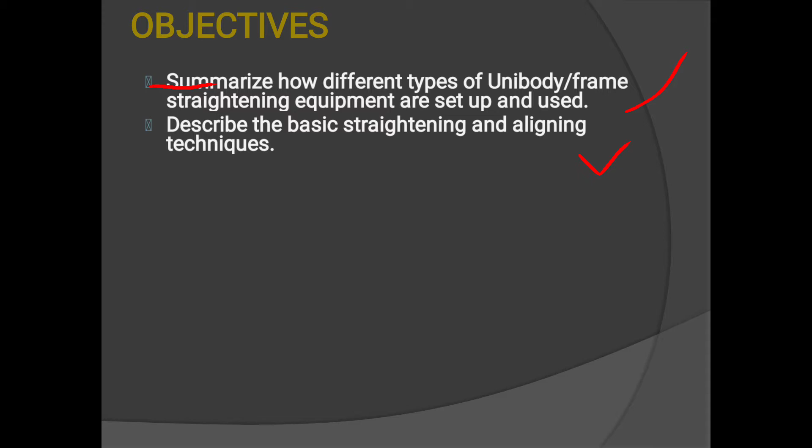First, objectives. Summarize how different types of unibody frame straightening equipments are set up and used. Describe the basic straightening and aligning techniques. Determine pull directions by analyzing damage.

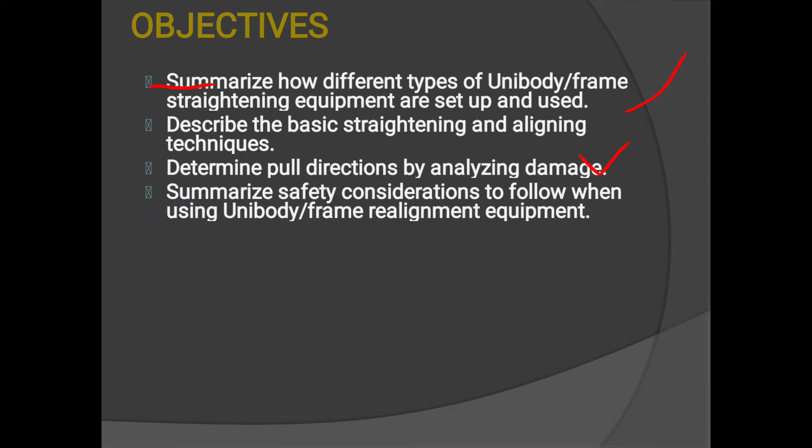Summarize safety considerations to follow when using unibody or frame realignment equipments. Properly plan and execute collision repair procedures. Identify signs of stress or deformation on a unibody vehicle and make the necessary repairs.

Compare the difference between the straightening of unibody vehicles and larger full-frame vehicles. Explain why you might need to pull damaged parts before their removal.

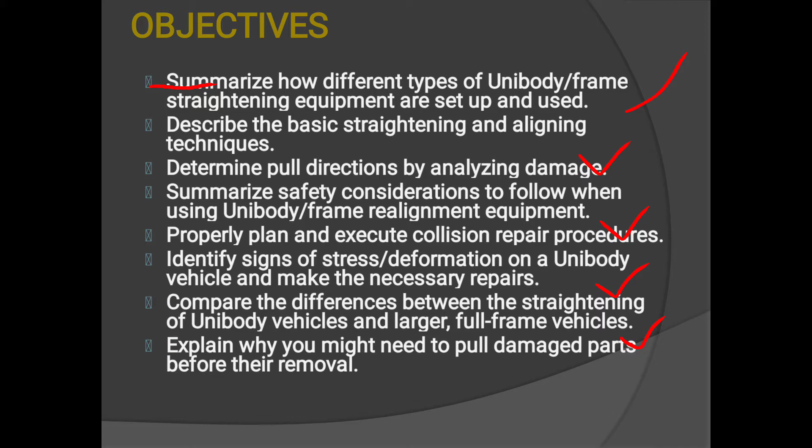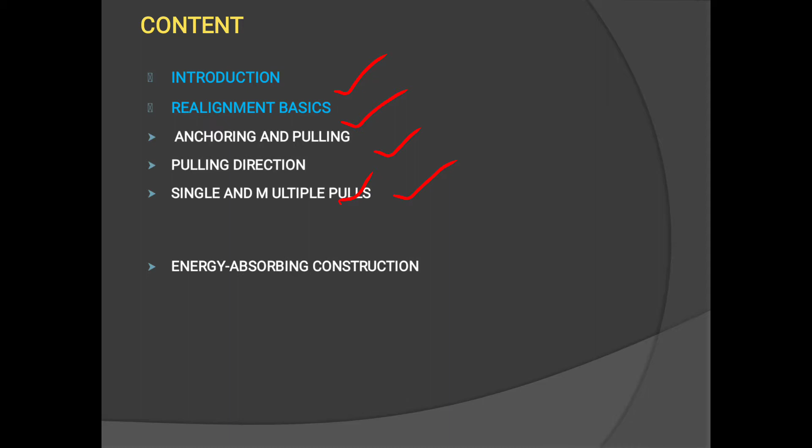Content. First, introduction, then realignment basics. In realignment basics, anchoring and pulling directions, single and multiple pulls, energy absorbing construction,

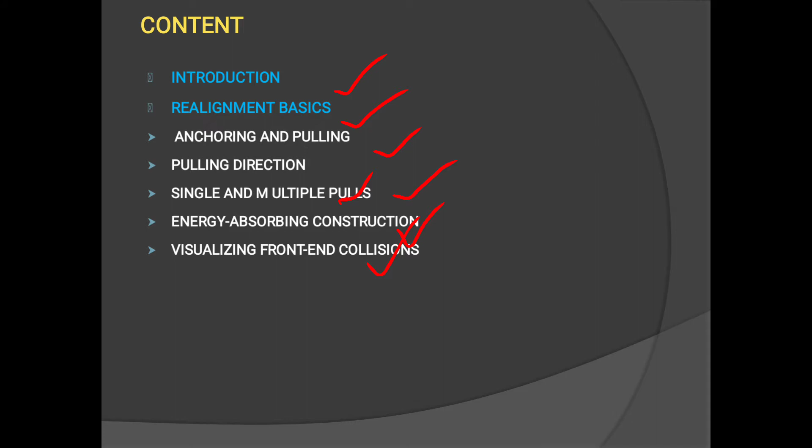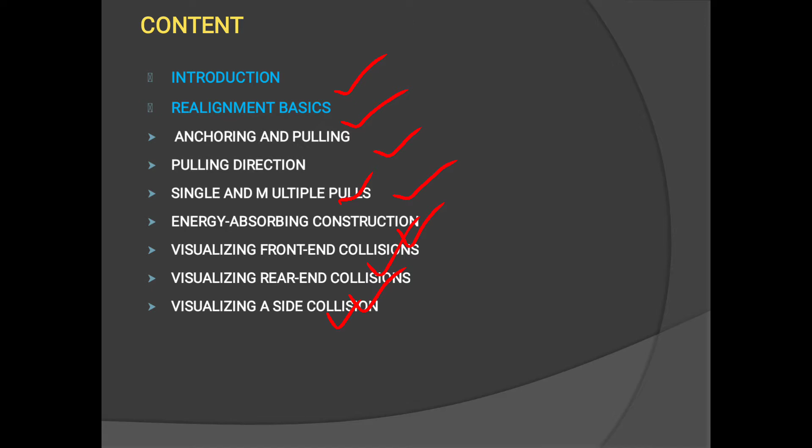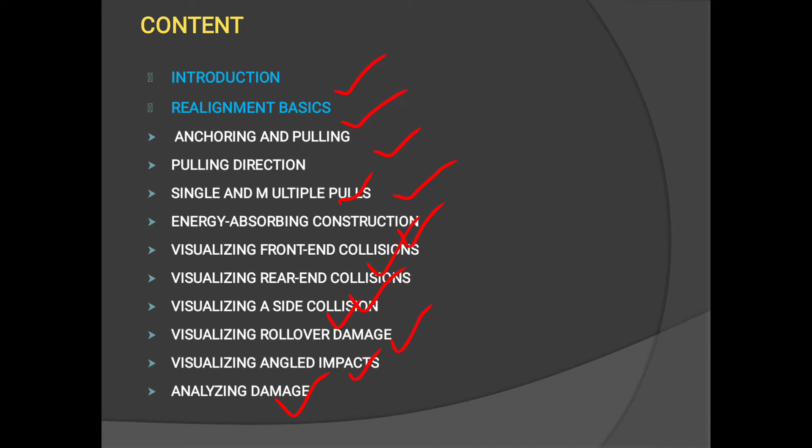visualizing front end collision, visualizing rear end collision, visualizing side collision, visualizing rollover damage, visualizing angled impacts, and analyzing damage. So let's start with the introduction.

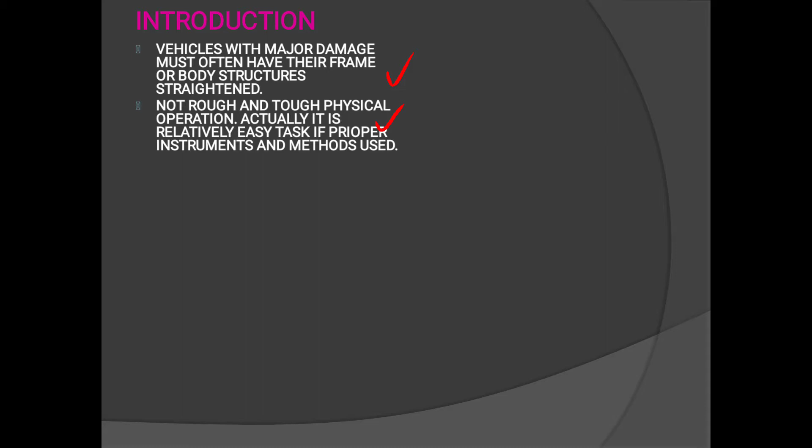Vehicles with major damage must often have their frame or body structures straightened. It is not a rough and tough physical operation. Actually, it is a relatively easy task if proper instruments and methods are used. An important requirement when straightening is accuracy. If the frame or unibody is not straightened exactly, panels will not fit and the wheels may not be alignable.

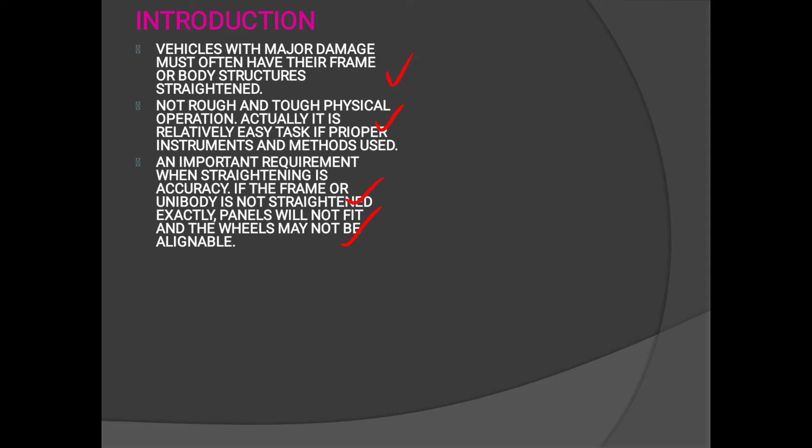It involves using high-powered hydraulic equipments, mechanical clamps and chains to bring the full frame or unibody structure back into its original shape. Accurate vehicle alignment positively affects safety, repair time, repair quality, and the confidence of your customers.

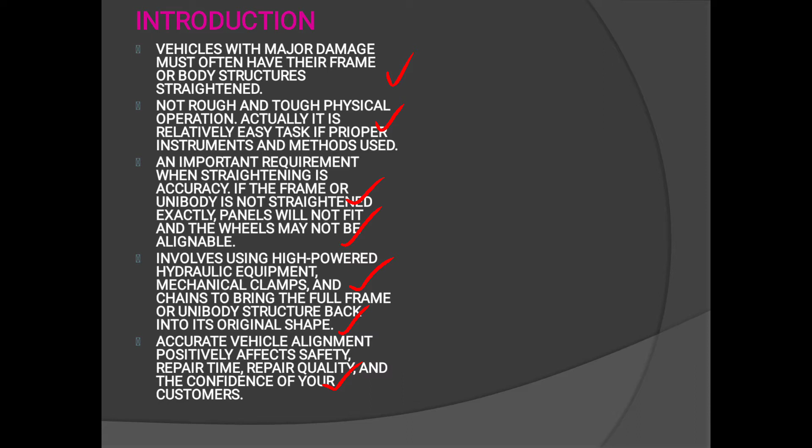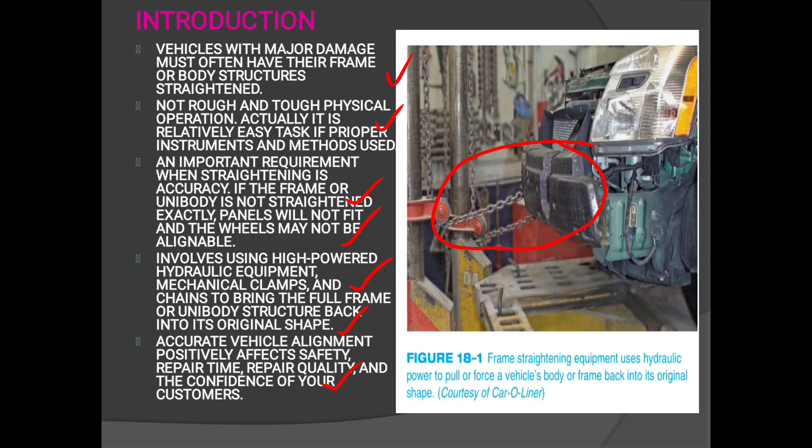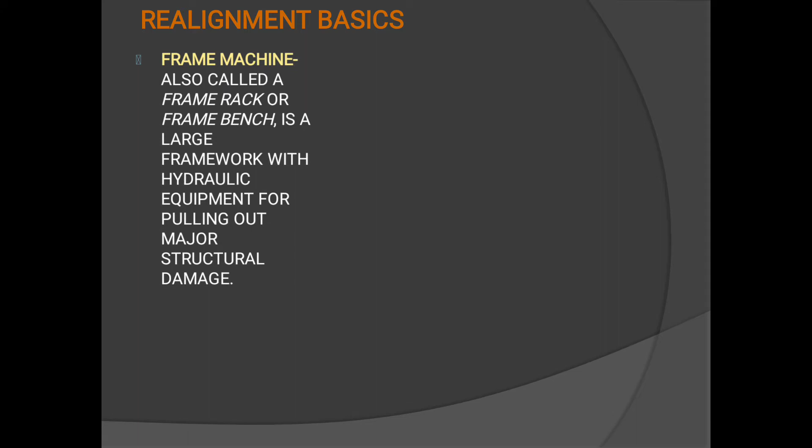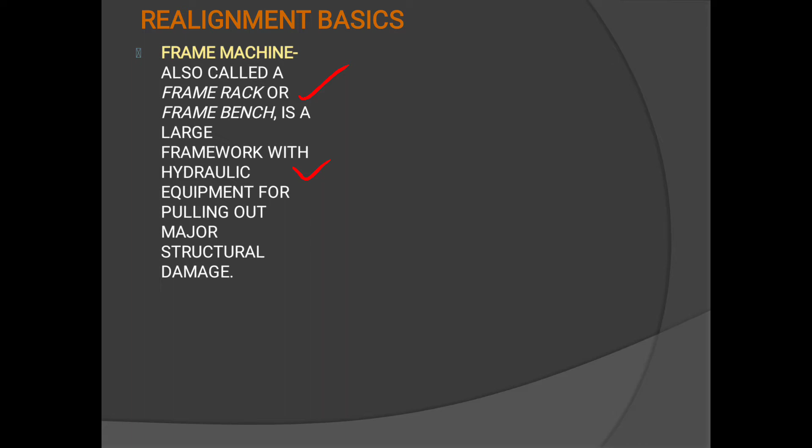Figure shows frame straightening equipment uses hydraulic power to pull or force a vehicle body or frame back into its original position or shape. Realignment basics. Frame machine, also called a frame rack or a frame bench, is a large framework with hydraulic equipments for pulling out major structural damage.

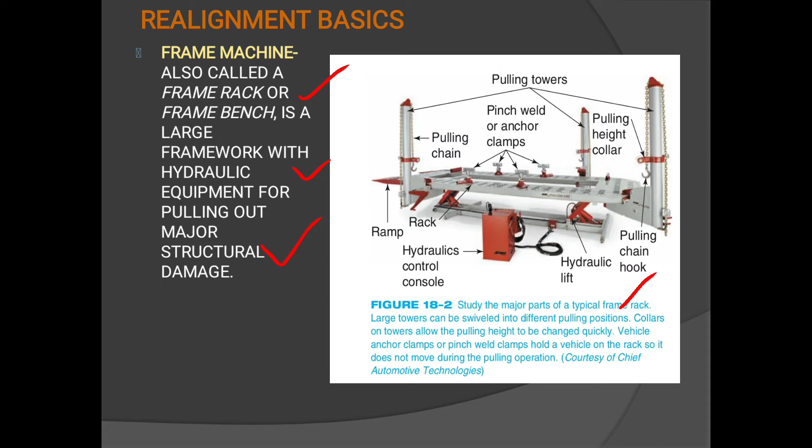This figure shows the major parts of a typical frame rack. Large towers can be swiveled into different pulling positions. Collars on towers allow the pulling height to be changed quickly. Vehicle anchor clamps or pinch weld clamps hold a vehicle on the rack so it does not move during the pulling operation.

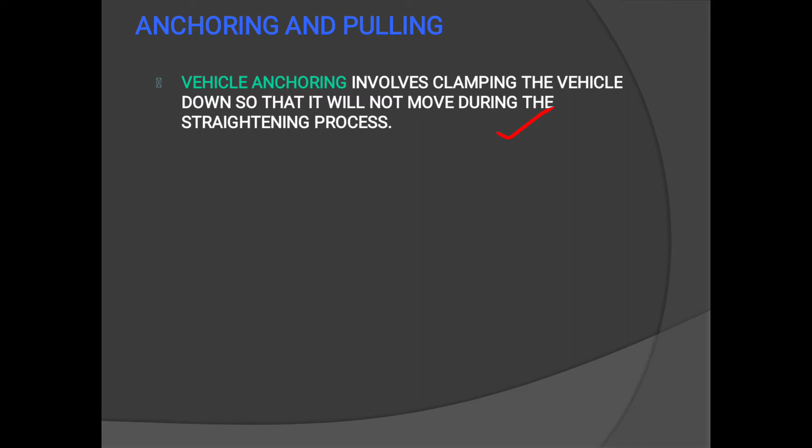Anchoring and pulling. Vehicle anchoring involves clamping the vehicle down so that it will not move during the straightening process. The term pulling refers to using hydraulic realignment equipment to stretch the damaged metal back out to its original shape.

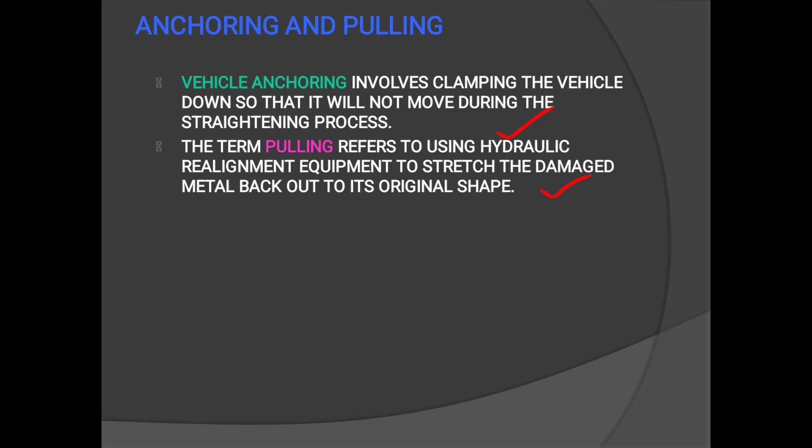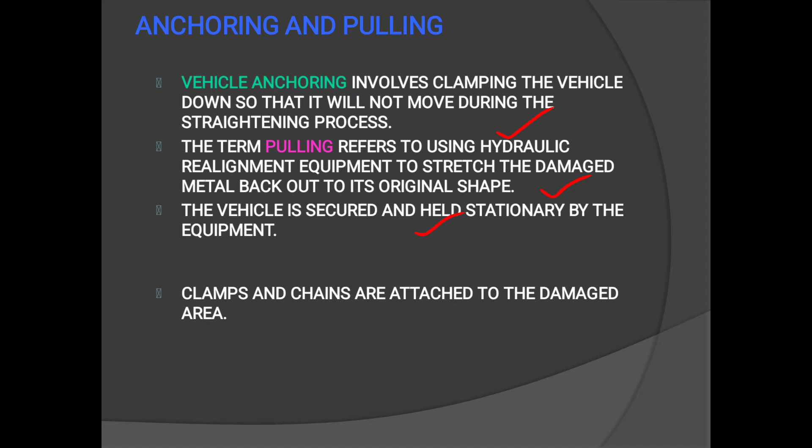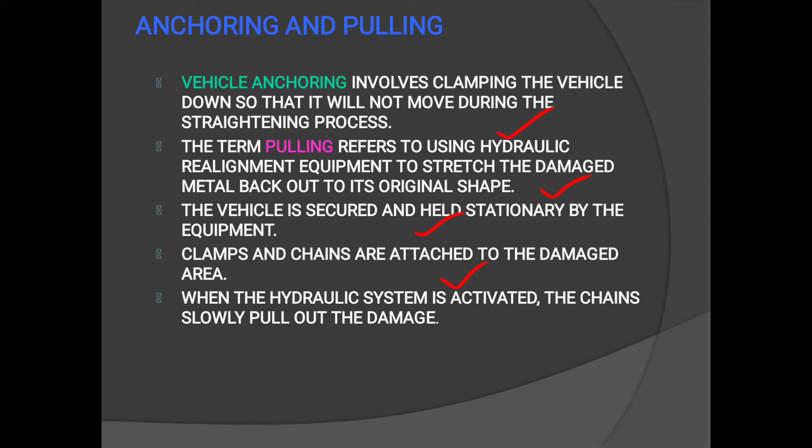The vehicle is secured and held stationary by the equipment. Clamps and chains are attached to the damaged area. When the hydraulic system is activated, the chains slowly pull out the damage.

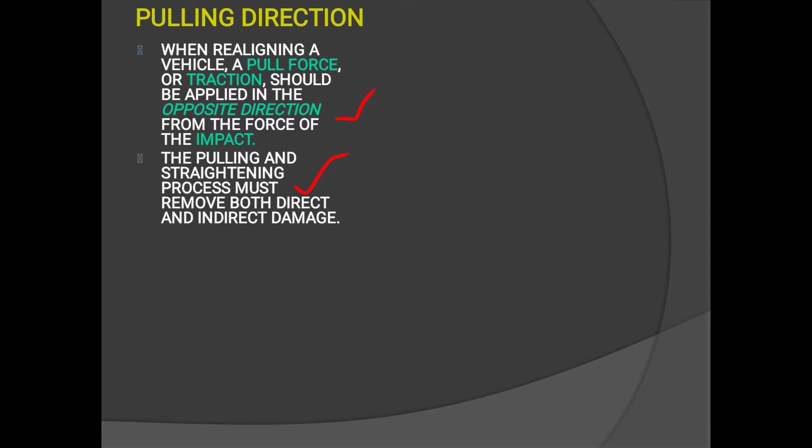Pulling directions. When realigning a vehicle, a pull force or traction should be applied in the opposite direction from the force of the impact. The pulling and straightening process must remove both direct and indirect damage. Generally, the damage that occurred last during the collision should be pulled first.

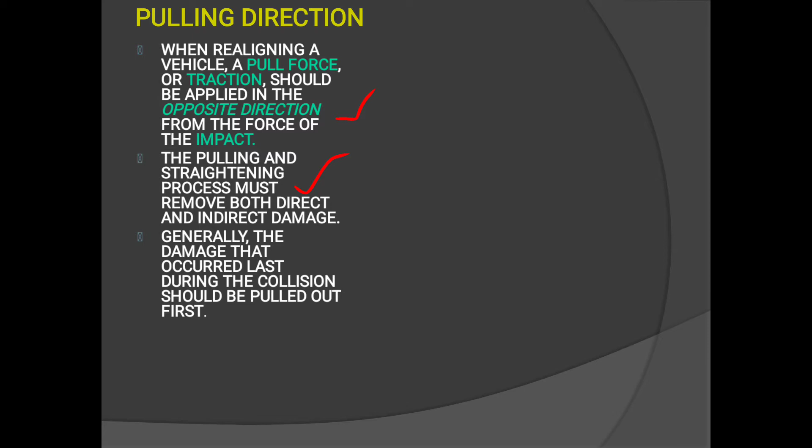The figure shows during a simple collision, the frame or unibody structure is crushed straight back with no deflection. Pulling or frame straightening involves holding the frame while using chains to pull it straight back to reverse the direction of damage.

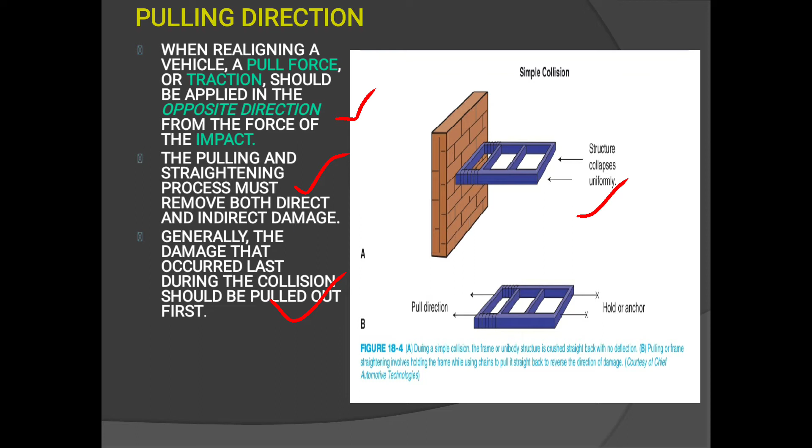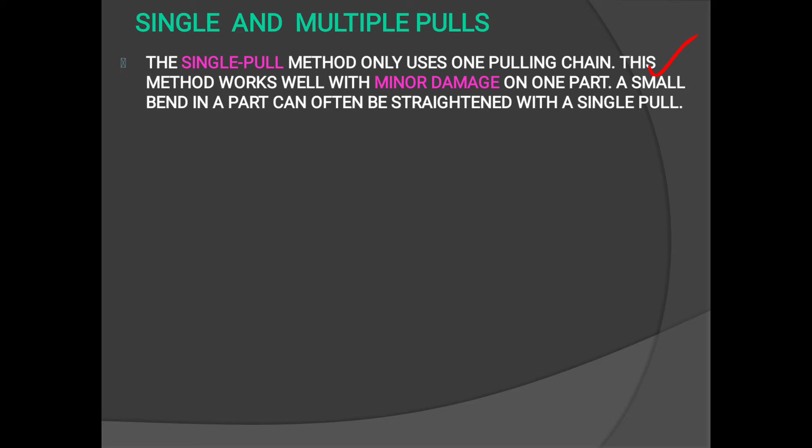Single and multiple pulls. The single pull method only uses one pulling chain. This method works well with minor damage on one part. A small bend in a part can often be straightened with a single pull. With major damage to several panels, a multiple pull method with several pulling directions and steps works best.

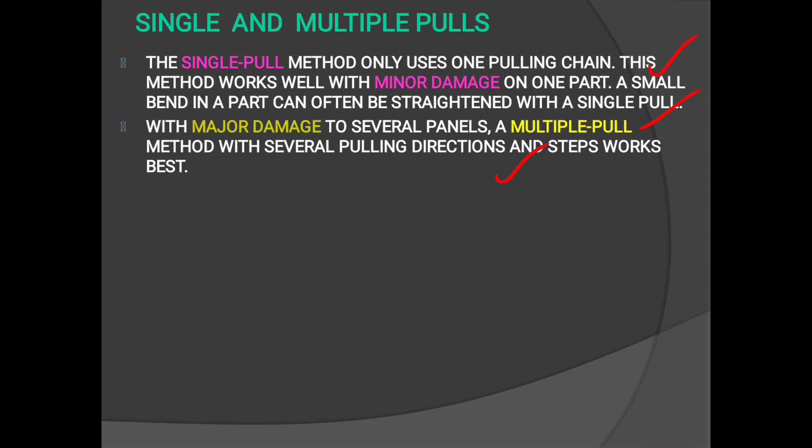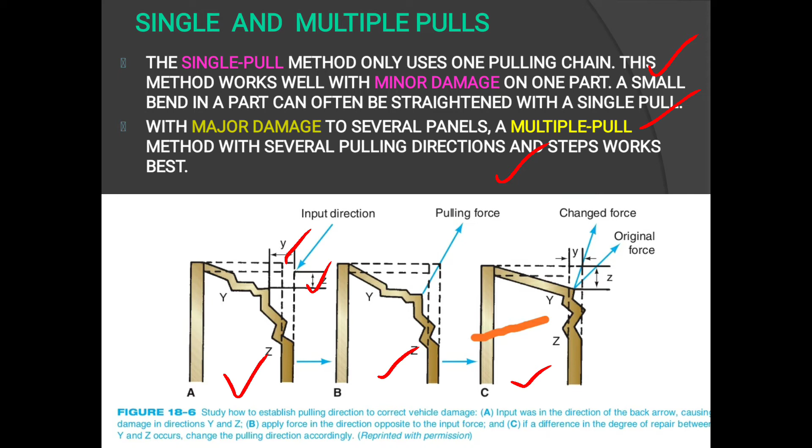Study shows how to establish pulling directions to correct vehicle damage. Figure A shows input was in the direction of the black arrow, causing damage in direction Y and Z. B shows apply force in the direction opposite to the input force. C shows if a difference in the degree of repair between Y and Z occurs, change the pulling directions accordingly.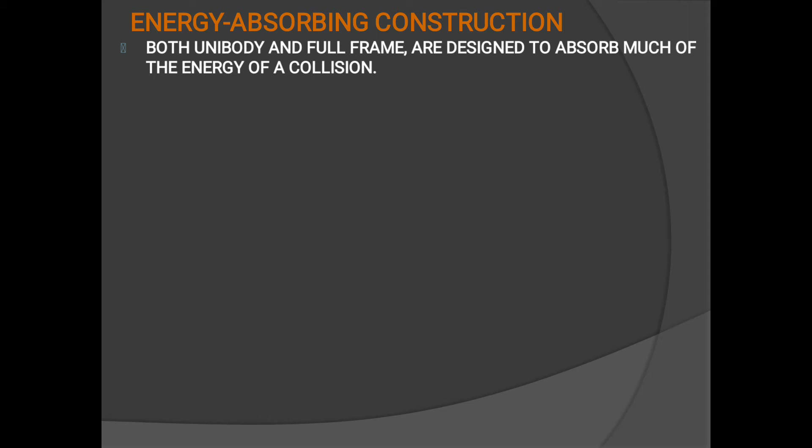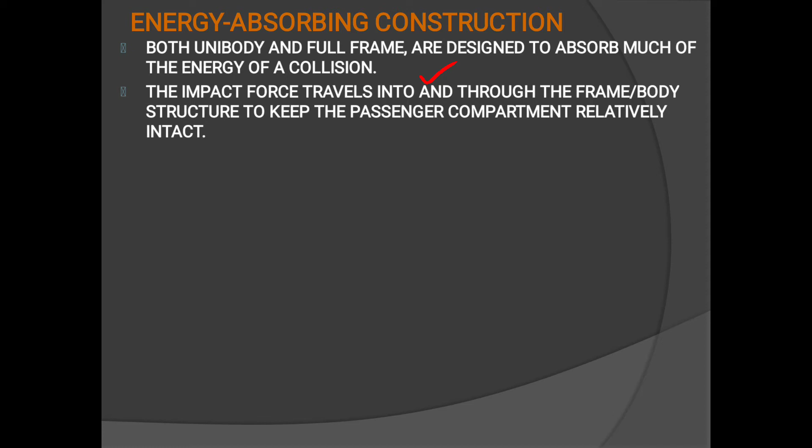Energy absorbing construction. Both unibody and full frame are designed to absorb much of the energy of a collision. The impact force travels into and through the frame body structure to keep the passenger compartment relatively intact. Note that the rockers and pillars are designed to absorb the damage in the event.

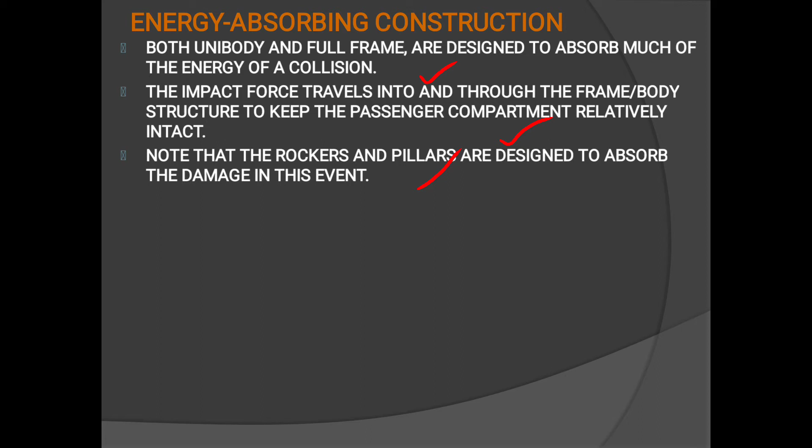Figure shows how impact forces travel through a unibody structure. Most of the damage is absorbed by the front section. However, with a hard hit, some damage can transfer into the front pillars, roof, and rockers.

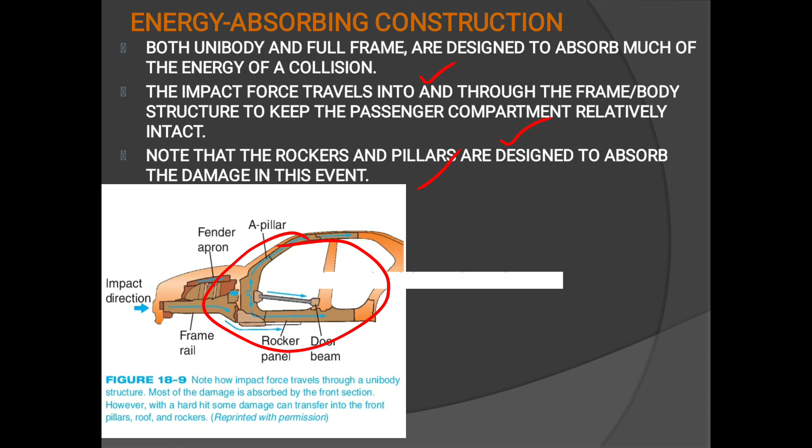This figure shows the rocker panel, doors and pillars are designed to absorb energy and prevent intrusion into the passenger compartment during a side hit. Ultra high strength steel in doors also protects occupants.

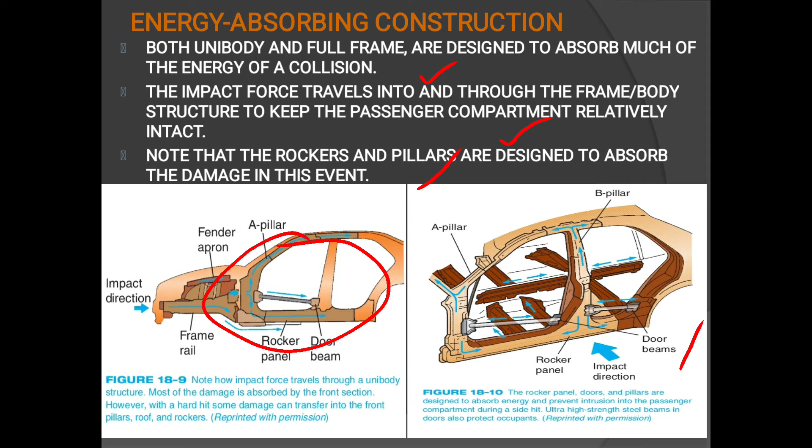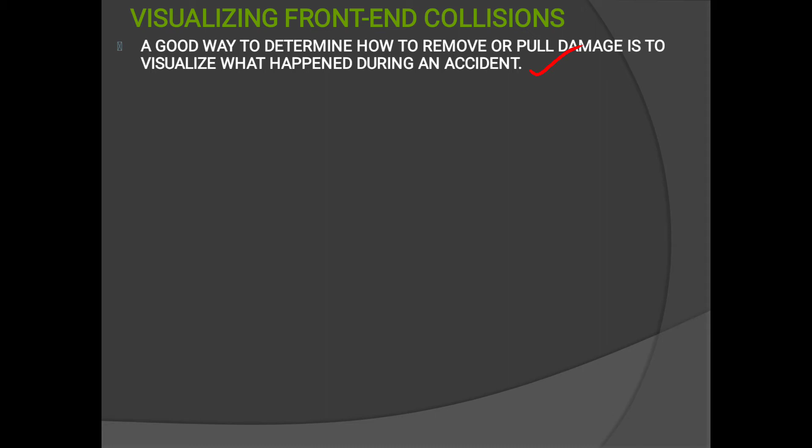Visualizing front end collision. A good way to determine how to remove or pull damage is to visualize what happened during an accident. This kind of thinking will help you pull the damage in the opposite direction from which it occurred.

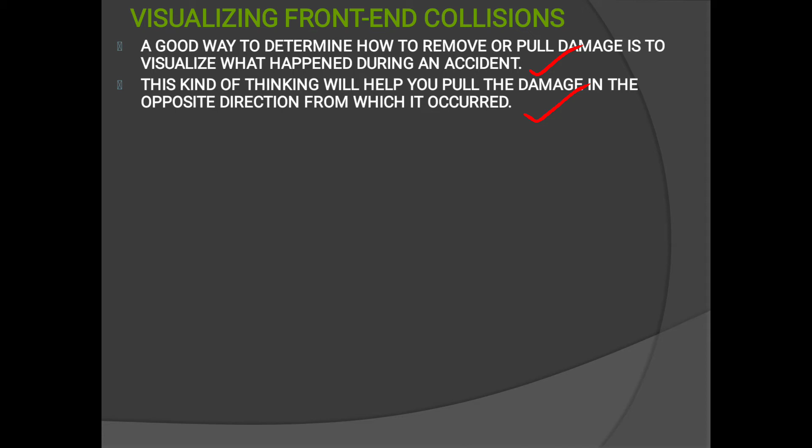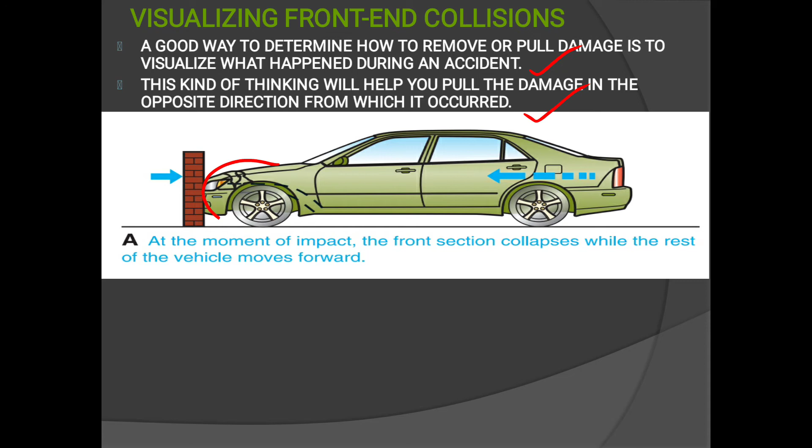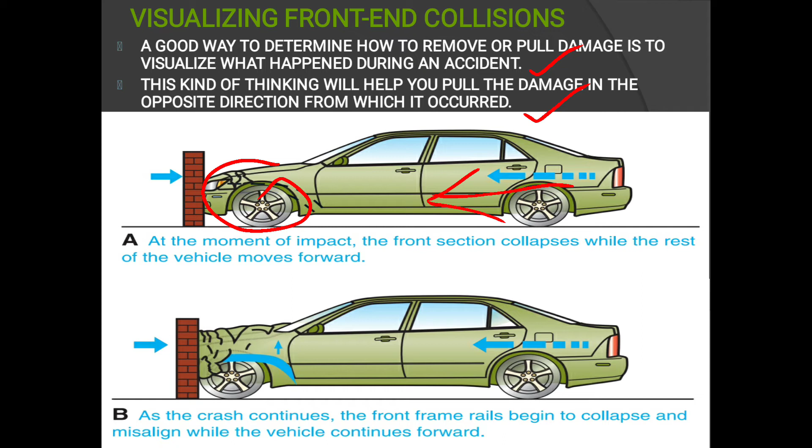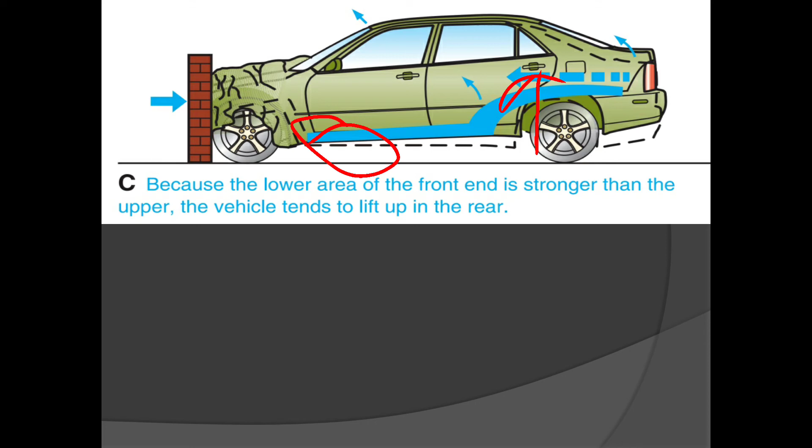Figure D shows if the speed is high enough, the front section completely crushes and the inertia of the rear of the vehicle causes secondary damage to the pillars and roof, causing door gap misalignments.

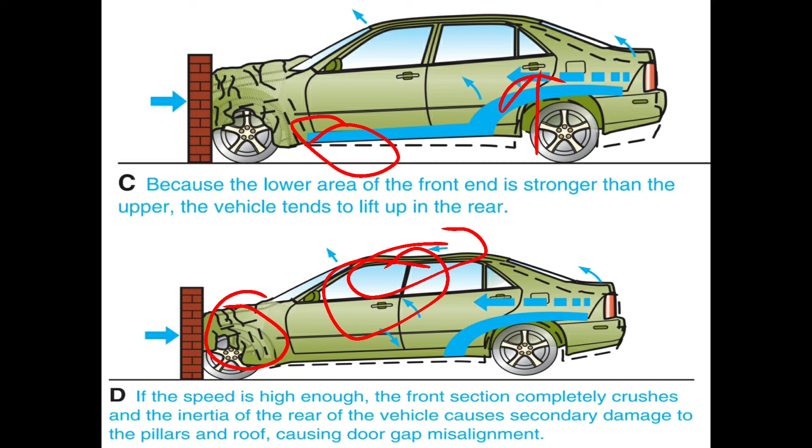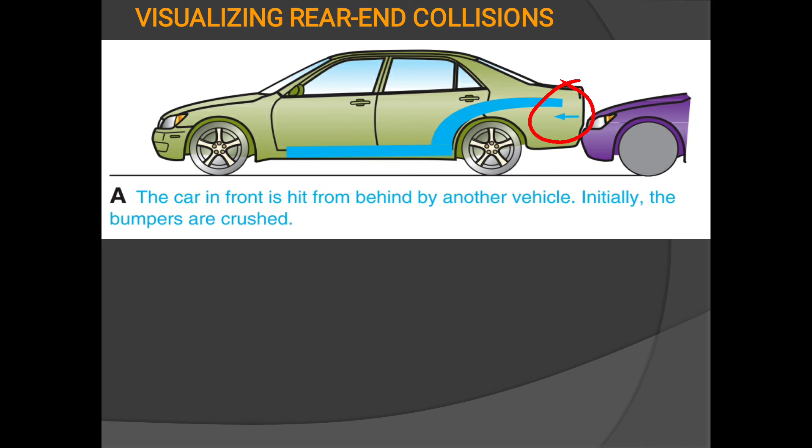Visualizing the rear end collision. Figure A shows the car in front is hit from behind by another vehicle. Initially, the bumpers are crushed. Figure B shows as the crash continues, the rear frame rails and trunk floor panel start to absorb impact energy. The area of the rail over the suspension starts to kick up and the rear of the rail often bends down.

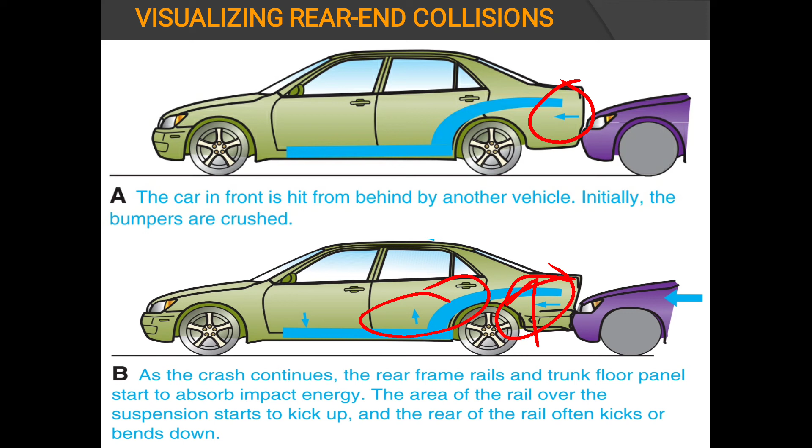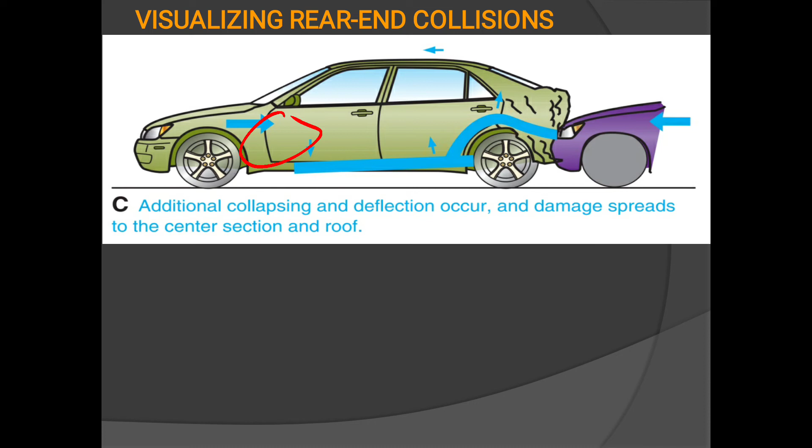Visualizing rear end collisions. Figure C shows additional collapsing and deflection occurs and the damage spreads to the center section and roof. Figure D shows with a sufficiently hard hit, the pillars are pushed forward and the rear section is forced upward.

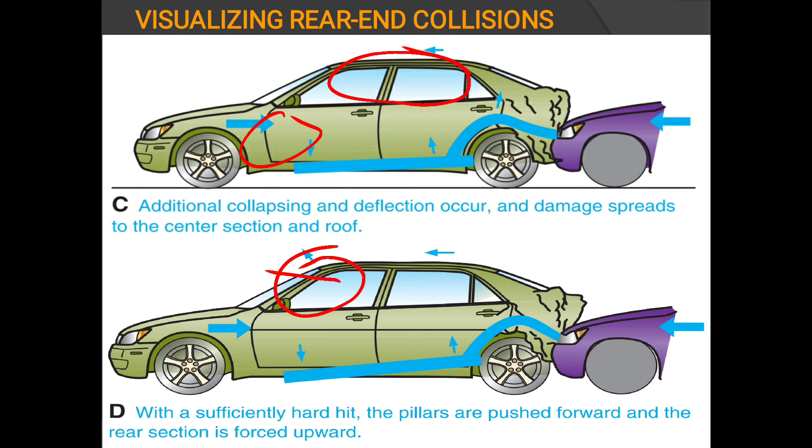Visualizing a side collision. Figure shows during a side collision or T-bone hit, one vehicle rams another from the side. The rocker panel, doors, and pillars absorb impact energy. The vehicle that is hit on the side often takes on a banana shape because the front and rear sections are bent sideways.

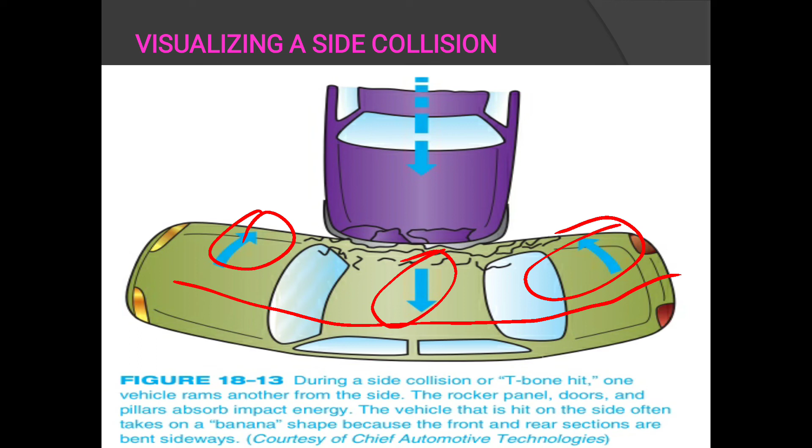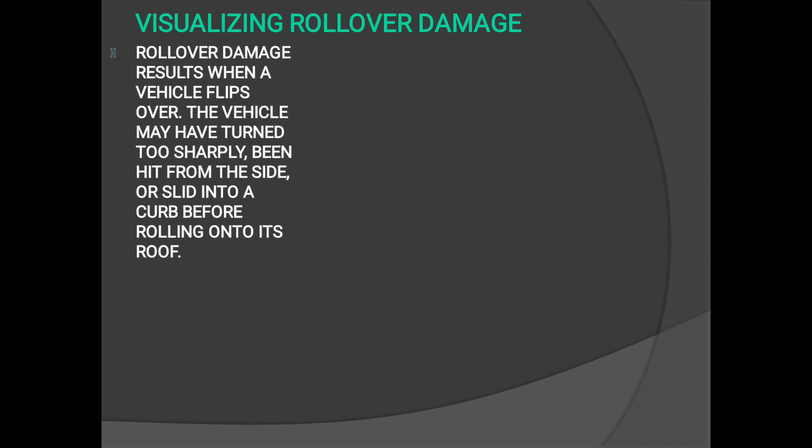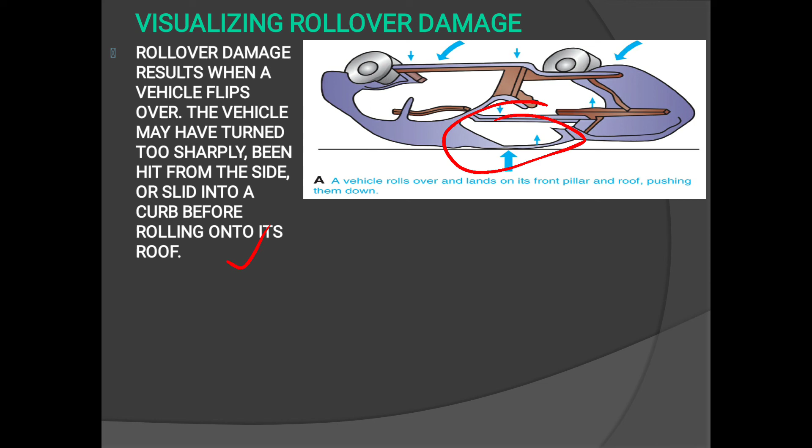Visualizing rollover damage. Rollover damage results when a vehicle flips over. The vehicle may have turned too sharply, been hit from the side, or slid into a curb before rolling onto its roof. Figure A shows a vehicle rolls over and lands on its front pillar and roof, pushing them down.

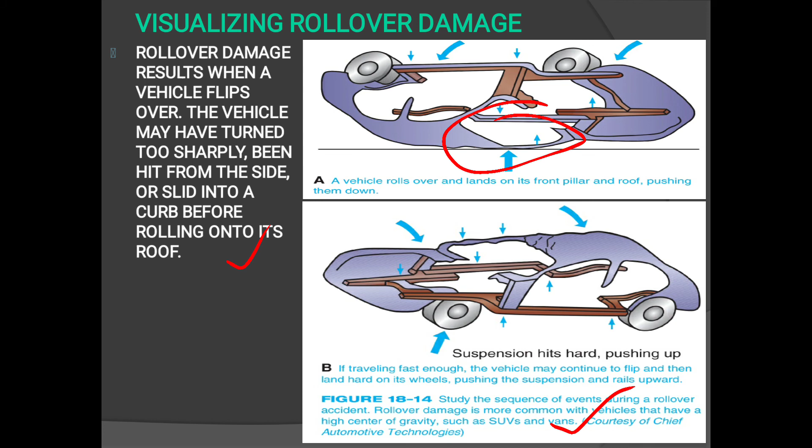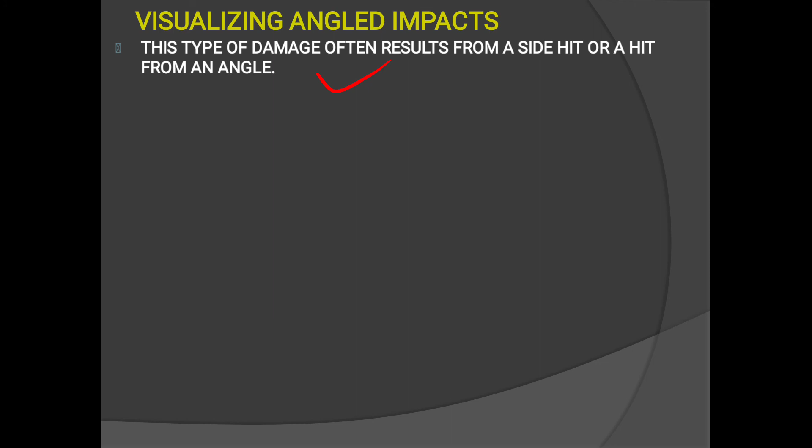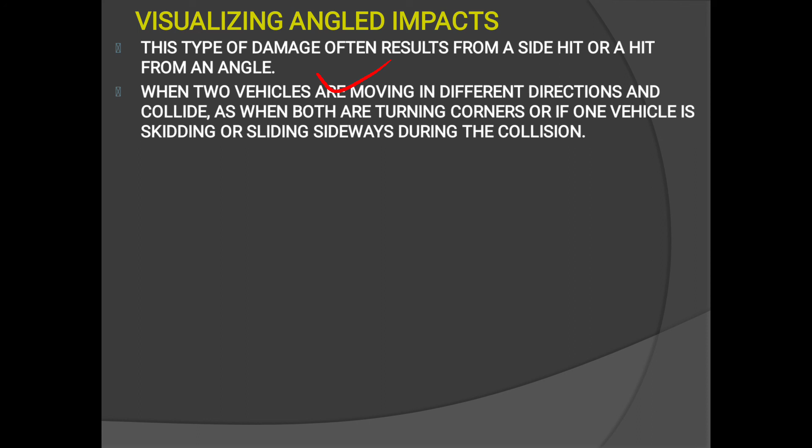Visualizing angled impacts. This type of damage often results from a side hit or a hit from an angle, when two vehicles are moving in different directions and collide, as when both are turning corners, or if one vehicle is skidding or sliding sideways during the collision. You can see in this figure how to visualize angled impacts.

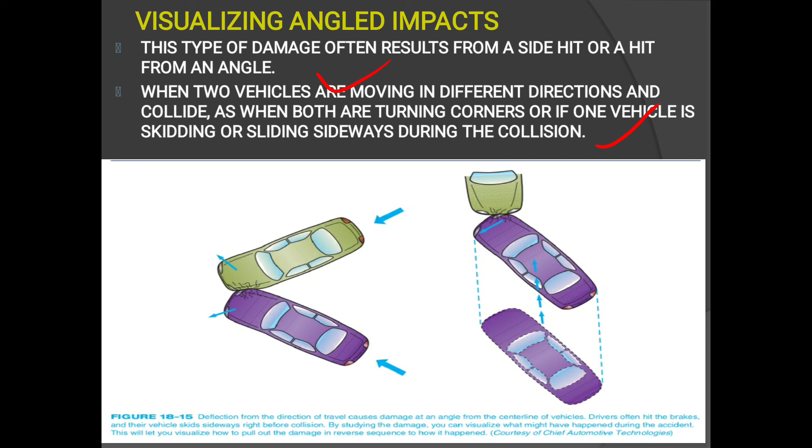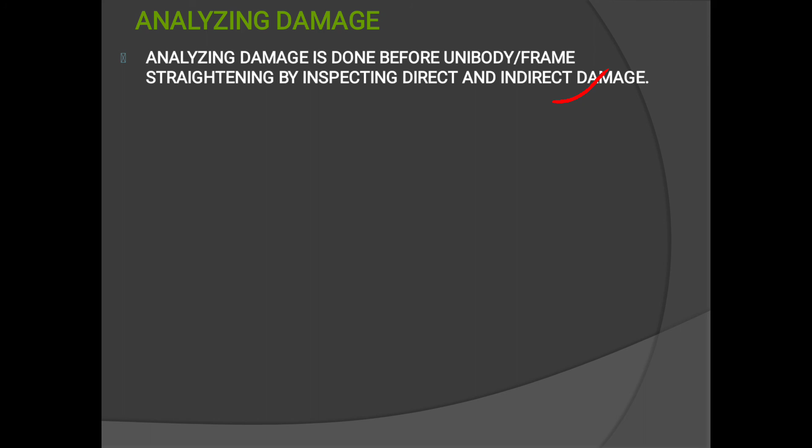Analyzing damage. Analyzing damage is done before unibody frame straightening by inspecting direct and indirect damage. Direct damage can be shown on the rails, front rails, and indirect damage can be seen on the large panels like a quarter panel, doors, and pillars. Regarding vehicle dimensions, there are three types of directions of unibody frame damage.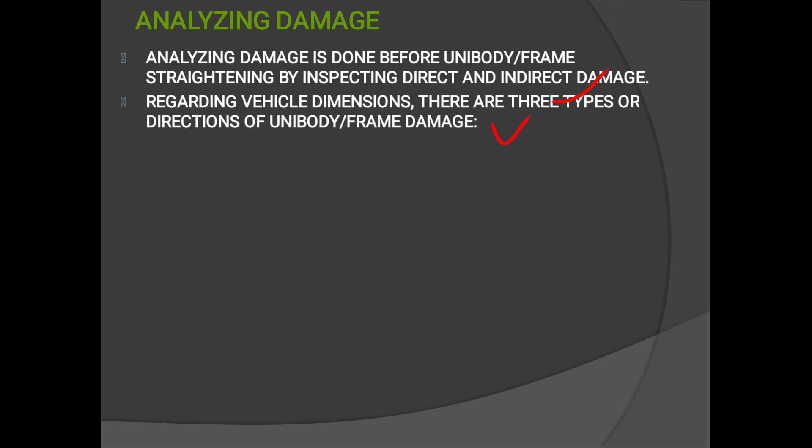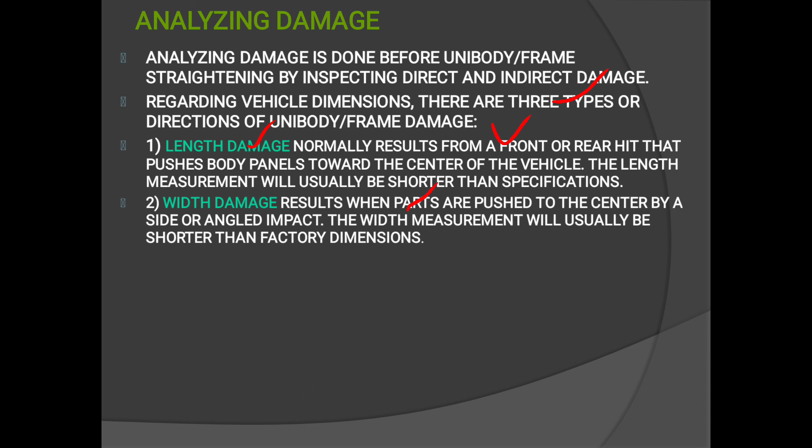First one is length damage. It normally results from a front or rear hit that pushes body panels towards the center of the vehicle. The length measurement will usually be shorter than the specifications. Width damage results when parts are pushed to the center by a side or angled impact. The width measurement will usually be shorter than factory dimensions.

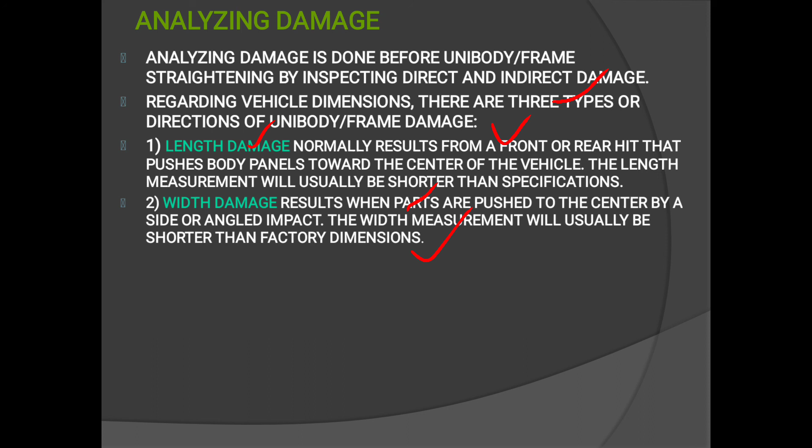Third one, height damage. Height damage results from impact damage that forces parts or panels up or down. A rollover accident will normally crush the roof down and cause the height dimensions to be too short.